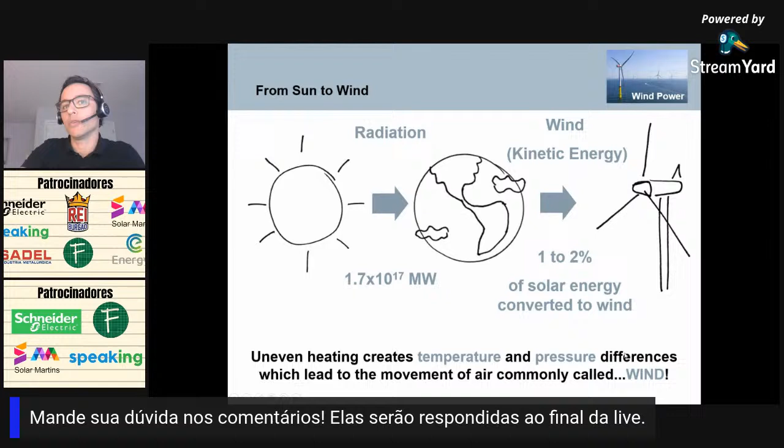So how does that work? From sun to wind. The radiation, I don't think it's new for you, you may already know this concept, but I'm gonna do this anyway. So like I said, the radiation from the sun hits the earth. It creates uneven heating on the surface of the earth, creates temperature and pressure differences, and leads to movement of the air, which is called wind.

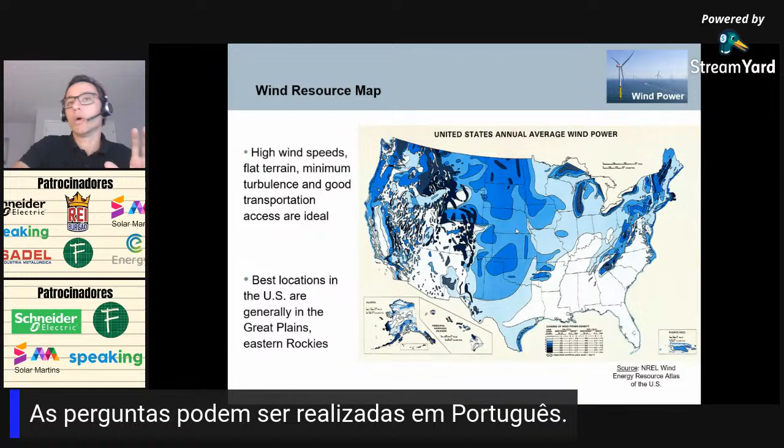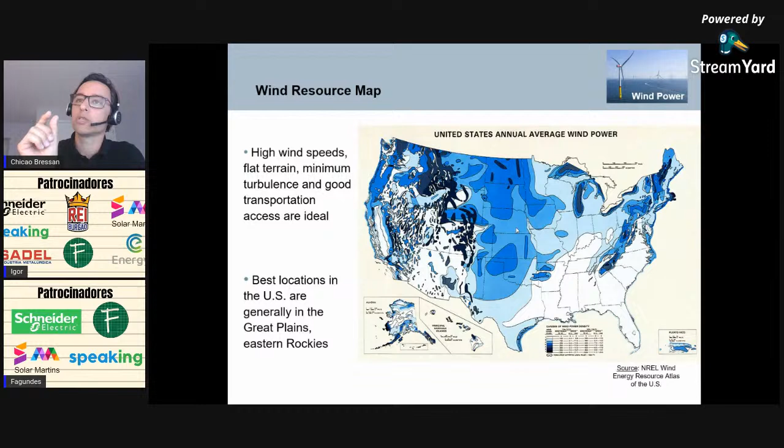So you have this kind of resource map, and this is a macro scale, but we can scale this down to look at a very small area as well, also in Brazil, in any place that you go, okay? Wind also changes over the day. In the morning, it will be maybe high, or in the night will be low. During the night there might be lower winds or might be higher winds, depending on where you are.

It also varies a little bit over the months of the year, right? So if we have wind over here, you see it going up and down over the months. So we have sometimes a better month than the other. It's seasonal, okay? So over one year, we can measure maybe in the summer we have more wind, in the winter we have less wind, and it also varies in years.

So for example, look at this graph right here. In 2007, it was a good year of wind in this place. I don't know where this is, but 2007 was a good year, while 2010 was a bad year. So we have good years, bad years, but overall it averages out at some point. In this case, averaging around 7.6 meters per second.

So wind is not constant, not really reliable in a way to say that you can count on it to produce the exact amount of power. It will go up, it will go down during the day, it will do the same thing over the week, the month, and the year, okay? It will vary. That's the nature of wind.

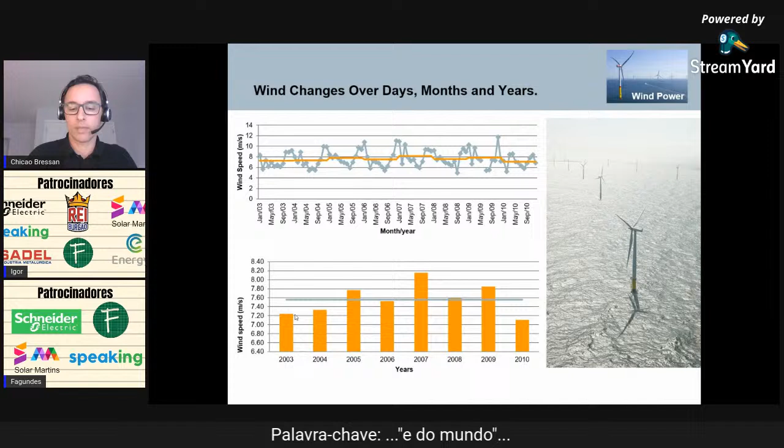Also, another characteristic is called wind shear and turbulence. So there is more turbulence near the ground here, right? Because the air and the wind will have to go through obstacles over here. There are rocks, there are trees, there are houses, there are hills and mountains, and so on.

And as we go higher, the wind will also be higher in speed, in most of the cases, not everywhere. We have more velocity when we go up, and also more steady wind, not too much turbulence, right? Okay, this depends on the place.

For example, in Itajubá, on top of the mountain, it might be different. It might not look nicely like this. It might have even lower wind up there than on the ground. Okay, but this is a normal characteristic, a normal profile for wind shear.

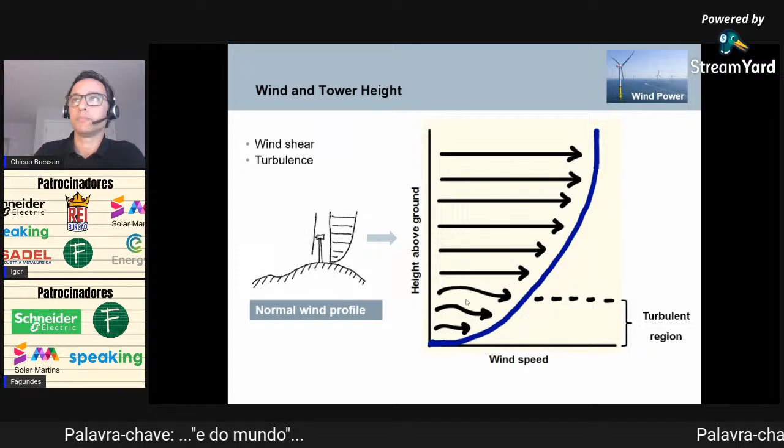All right. Then there was this man here called Bernoulli. You probably heard of him already in Itajubá, right? He says, as the speed of a moving fluid increases, the pressure within the fluid decreases. So thank you, Mr. Bernoulli. With that, we could design the profiles here.

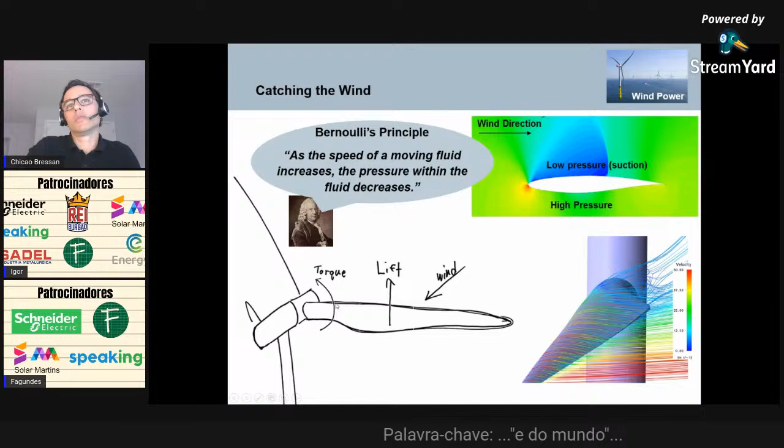For example, the wing of an airplane is pretty much the same thing. So wind turbines like this over here are nothing more than 3 wings of an airplane, let's say, attached together to make a rotor there. So what we want to have here with the flow that goes around it is to increase the pressure under the blade, lower the pressure on top of the blade due to the profile over here, right? So we create a force called lift, okay? And with the lift that we have on each of the blades, we can then turn that into torque here on the rotor, okay?

All right, thank you, Mr. Bernoulli. Next one, energy production. I like to look at this as this is how we calculate the availability of power. And it's a very simple equation here. It's not really complicated too much. If you look at this equation over here, this is the power that we can extract from wind, not the power that is produced in the turbines. This is how much power, in theory, we would be able to extract from the wind.

Actually, there's something that's called the Betz limit, because the maximum possible output that we can get from a wind turbine, and a 3-bladed wind turbine like this one, the very common one that you find, is about 59%. So 59% of all the wind that comes in can be made available to be then captured by our turbine.

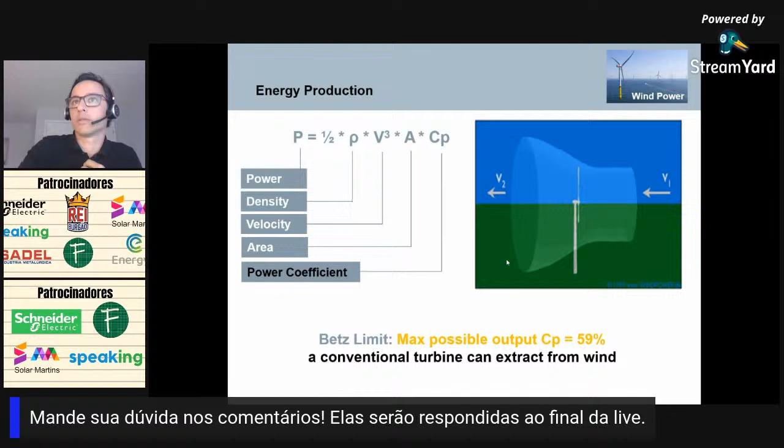Okay, so this is a limit here, because when the air flows through the blade, through the rotor right here, it does not stop right after the rotor. There is no zero velocity right over here. There is still wind over here. There will always be some wind after the turbine. So we can't get all of that power in the turbine, because we're not able to capture all of the wind. So there's a coefficient that we have to add here in the end.

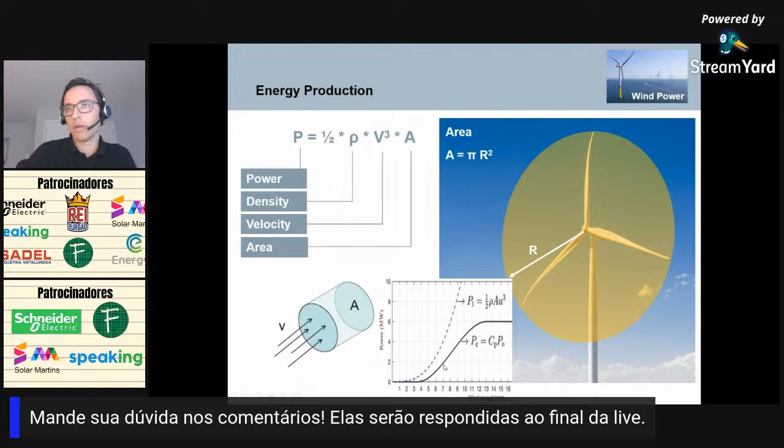Okay, then we can draw what's called a power curve. I'm going to go back 2 slides here and tell you. See, this shape looks like the letter S, right? This shape right here is the same shape right around here. And it's important that we look at the wind power curve, or the turbine power curve, because of different things and different aspects.

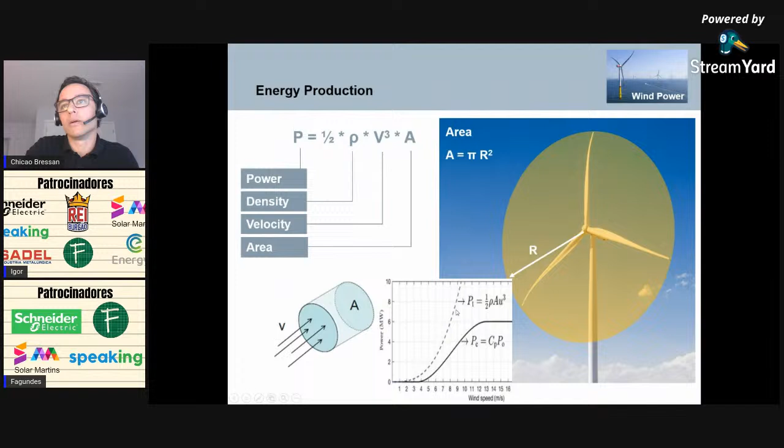Now, if we look at just this part of the curve right here, it looks a lot like this curve right here. So at this point, this is the maximum power that I can extract from the wind, right? Now, after this point right here, the curve starts to tip to the other side. So this side here on the left is facing up, the other side on the right is facing down right here. So why does it start to face down?

So I start to pitch the blade out and let wind go through the rotor and not capture all of that wind. I just let it go by, because if I capture all that wind, the machine is going to break, right? So I have to stop my design at some point. Then I stopped at a certain point right here, which is my design rated power, right? So rated wind speed. So this is the maximum power that I can achieve in my turbine right here.

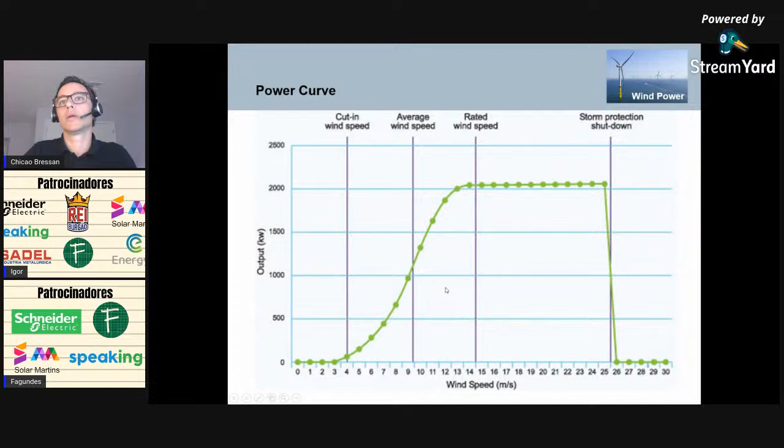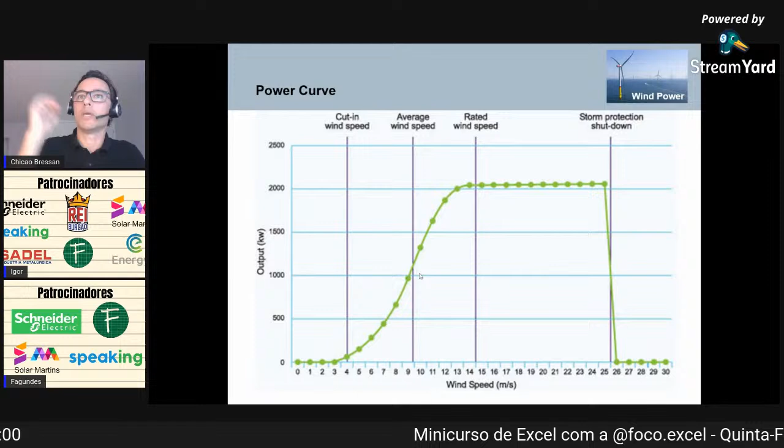When do we start? When do we stop? As far as power goes, when do we stop at the maximum speed here? And important, what is our average? Because this point right here would have to be our best design point. We have to make the turbine to meet that, because that's our best efficiency point, right?

Okay, so talking about how the power, how the energy flows through the turbine. This is a diagram only, okay? Diagrama, only a diagram, right? To make things easier. So we have a rotor and a gearbox.

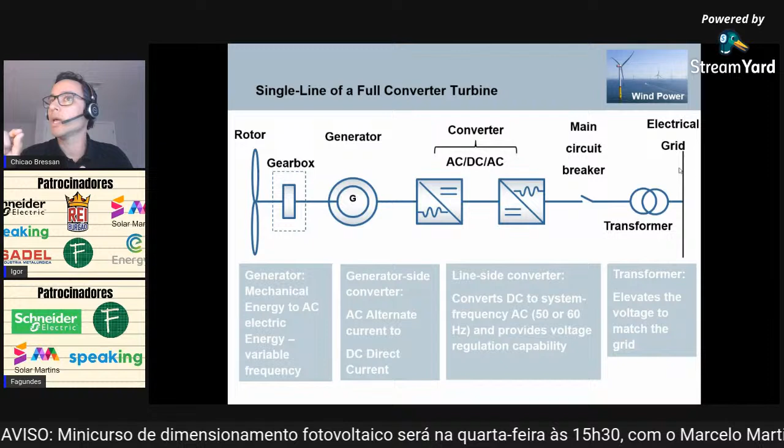But it has a very small deviation. I think it can get up to 60.9 or 60.5 or 59.2. But if it goes above or below that, it will shut down the machine, right? So the rotor here is spinning as much as we have wind. More wind, it might spin faster, less wind, it might spin slower. I cannot control that frequency and also the voltage. So the voltage and the frequency on my generator are all related to how much wind I have.

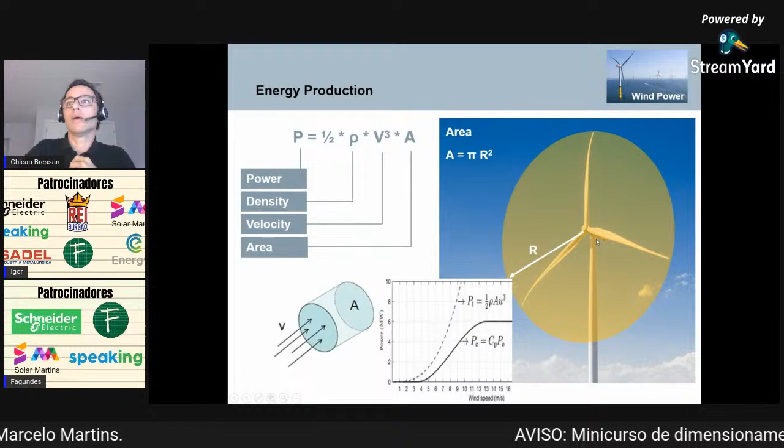So if I have a lot of wind blowing here, my RPM is high, my output is high, but also my frequency can be high and the voltage can be high. And my grid over here does not accept that. My grid has only a limited window that I have to follow. That's why I have to rectify it to DC, or convert it to direct current, and then convert it back

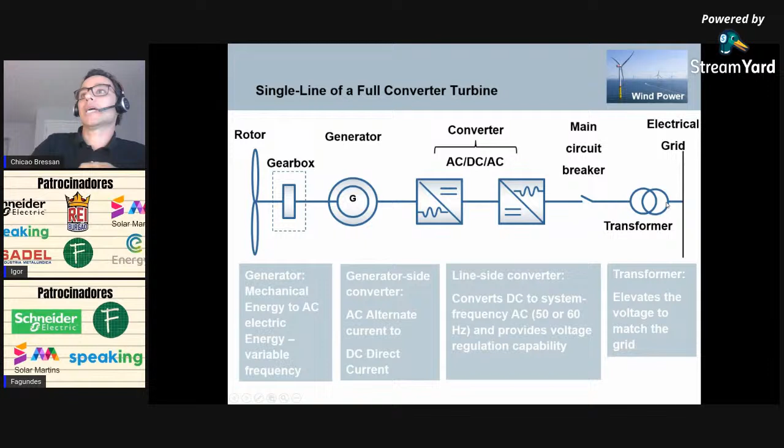to AC. I have to rebuild that sinus, reconstruir a senoide, né, da corrente alternada. Okay? Then we have the breaker here, como se fosse disjuntor, uma chave seccionadora, and the transformer over here to step up the voltage, right? So this is in a full converter machine.

So, all right, let's talk about specific components of the wind turbine now. I think everybody has seen the three-bladed wind turbine, right? And a lot of the questions that come are, why do we have 3 blades? Can't we have 2 blades? It would be cheaper, less money, with 2 blades. 4 blades would be better. I would have more efficiency with 4 blades, with 5 blades, with 6 blades, right?

The thing is, 3 blades is an optimal balance between efficiency on one side and cost, money on the other side, right? So the 3-bladed horizontal axis wind turbine is proven to be very good for this type of application. Can we add another blade? Yes, we can add another blade, but blades are expensive.

So if you put another blade in, it's going to cost a lot of money, and you're not going to get a whole lot of energy out of it anyways. Okay. All right. So let's go to components here.

Starting with foundation, right underneath the turbine over here. Everything is connected, people. Everything is connected. The blade that I choose, the design of the blade impacts my foundation, impacts the design of the foundation. Okay, so the foundation, we don't see it because it's hidden underneath the earth. We have the tower right here with a door that we can get in.

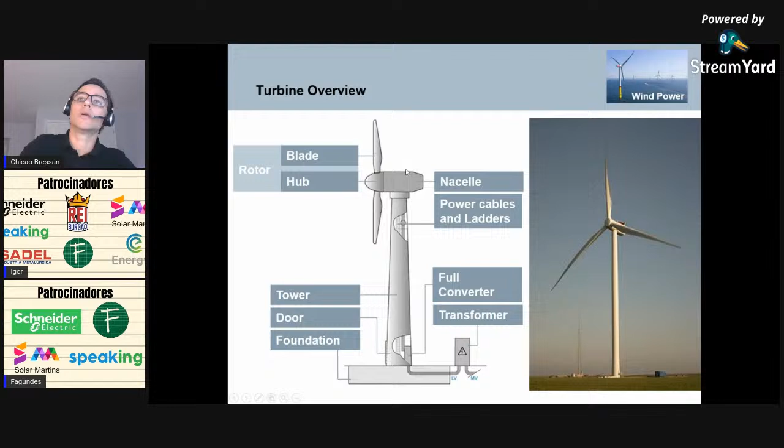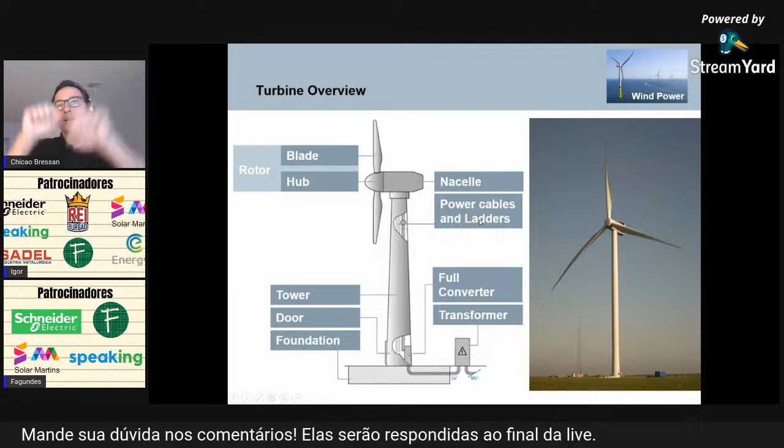In the full converter machine, normally you have the full converter down on the tower here, right? But there are other types of machines where the converter is also up over here. And the same thing with the transformer. Sometimes the transformer is down on the ground, or the transformer is up in the nacelle over here. Inside the tower, we have the ladders that you can climb, and you have the power cables, right? That make the transport of that energy out of the tower.

Nacelle, where all the magic happens. There we have the generator, a lot of stuff, we'll talk about it. And the rotor, blade and hub.

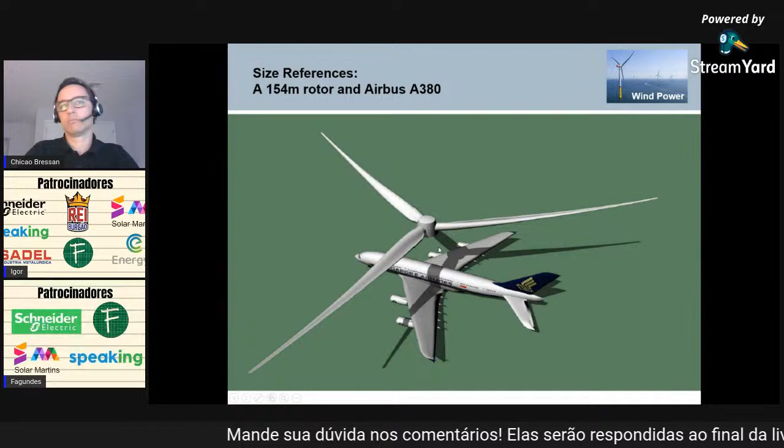All right. Next, just reference. So this is a typical rotor that we are installing in the United States now, 154 meter, and also in Brazil as well. 154 meter rotor, compared to an Airbus A380. So big airplane here and big rotor. So it's much bigger than the airplane. You can see just as a reference so you know how big these things are.

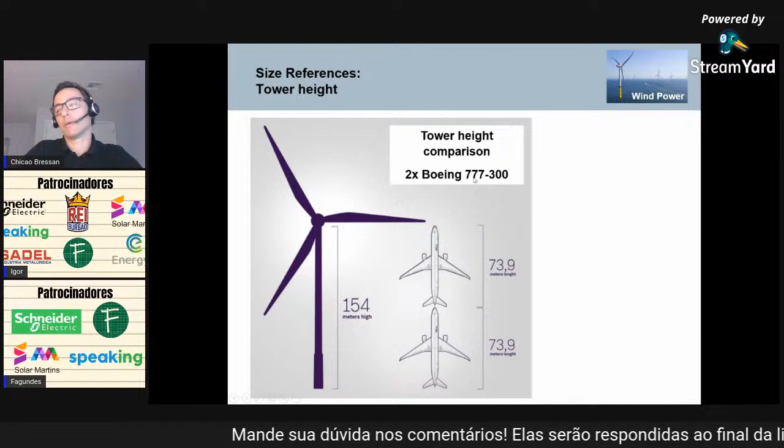Also another reference, since we're talking about airplanes, tower height. So the height of the tower here, coincidentally 154 meters high as well. This is our highest tower in my company, and it's equivalent to about 2 Boeing 777-300. Okay, talk about Airbus, have to talk about Boeing. I don't know.

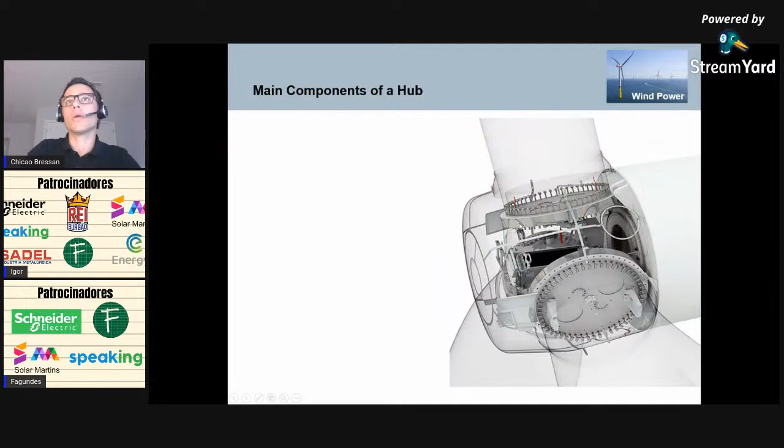Okay, what about the hub now? You can see inside the hub, then we have a hub casting, ok?

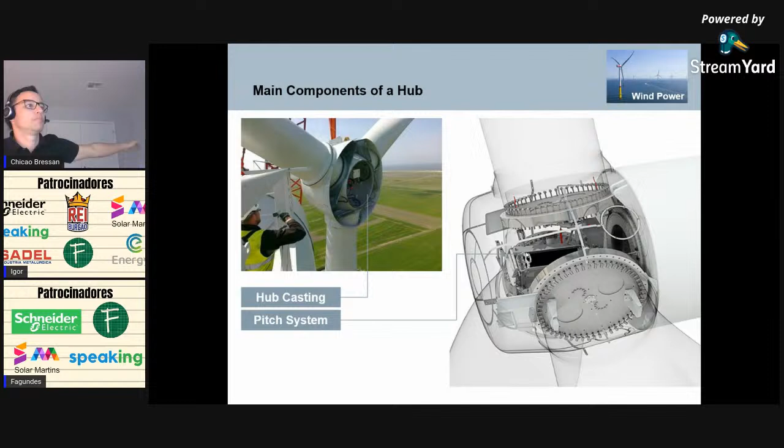This pitch movement here is the same thing as we do with the blades right here. So the blades also have the pitch. They can change the angle of attack to the wind. So there's a pitch system, and we'll talk about it later.

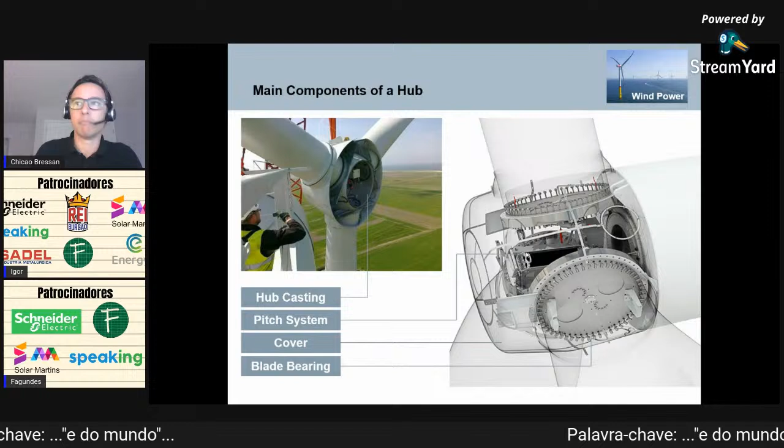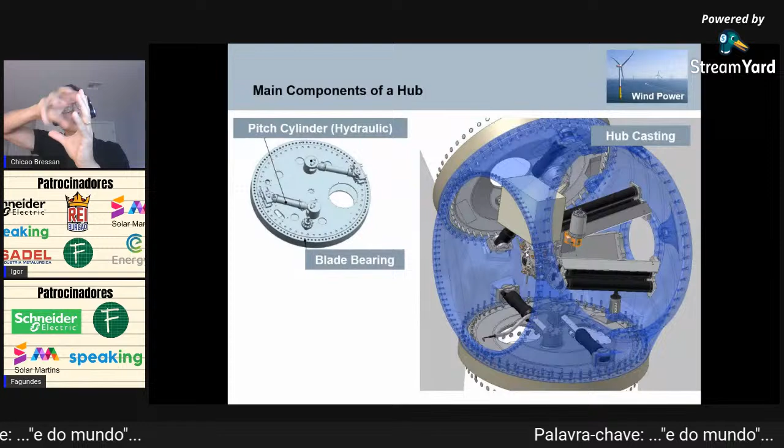The cover here, just a fiberglass cover. The blade bearing, which holds the blade and makes the pitch possible, right? So if you go in detail and do an X-ray of the hub, you see the casting, like I said, in blue here, and you see what's called a pitch cylinder. So there are two pistons, one on each side here, and they work against each other, right? So they can expand and they can retract, and by doing this, they can turn that blade bearing so the blade also turns.

So you do the pitch movement like this by putting hydraulic oil on one side of the pitch cylinder or on the other side of the pitch cylinder. Just like a car, like a motor with a piston that goes up and down, the same thing inside these two guys. There are other ways of doing pitch, like electric pitch, for example. So you can put an electric motor here, and you can turn that motor so it pitches the blade the way that you need them to pitch.

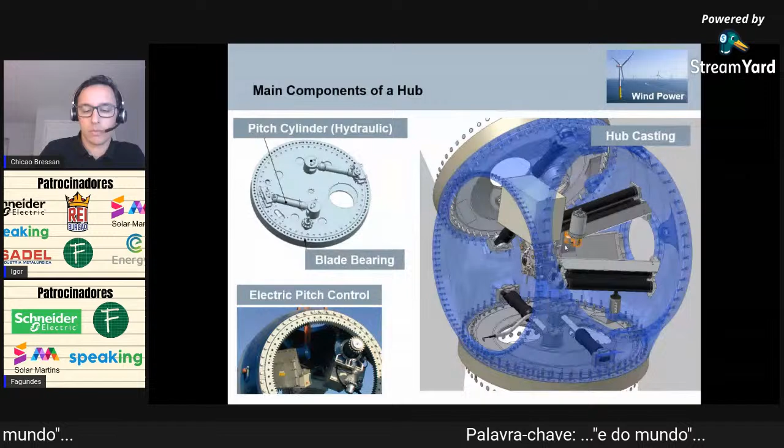So inside here, there's a control cabinet, there's a computer here, everything's spinning, everything is turning. It's very complicated to maintain everything in there. You have to have a lot of attention to the screws and bolts that you use here so that they do not get loose with time and things start moving around and banging everywhere there. So this is hub, okay? Let's see what else.

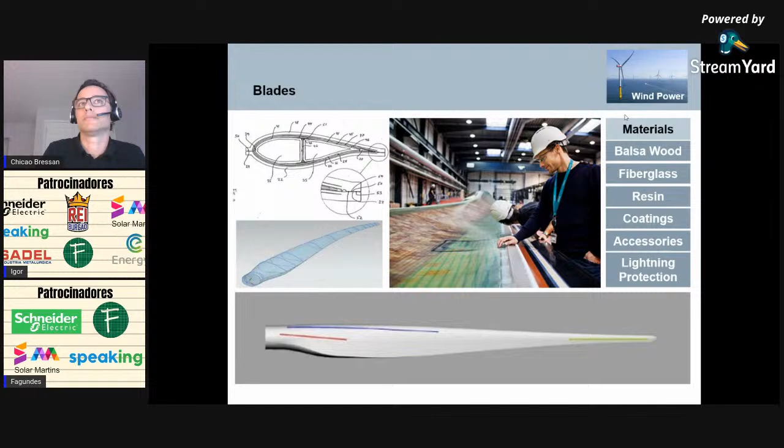Blades. This is not a blade. This is a mold for a blade. This is how blades are made, right? This is a mold for a 75-meter blade, right? You can see they're measuring there. That's where we would lay. This is only the half part. Then we have to put the top part on top. There is one just like this one that goes on top of it, right? So it forms like a shell like this.

We're gonna lay all the fibers. Fiber looks like fabric, like tipo tecido, né? Fiberglass is like fabric that will run the wood, the cable, the structure inside. Then we'll inject liquid resin, right? And then it will cure. And when it cures the resin, then we're going to have the blade, right? So something like this.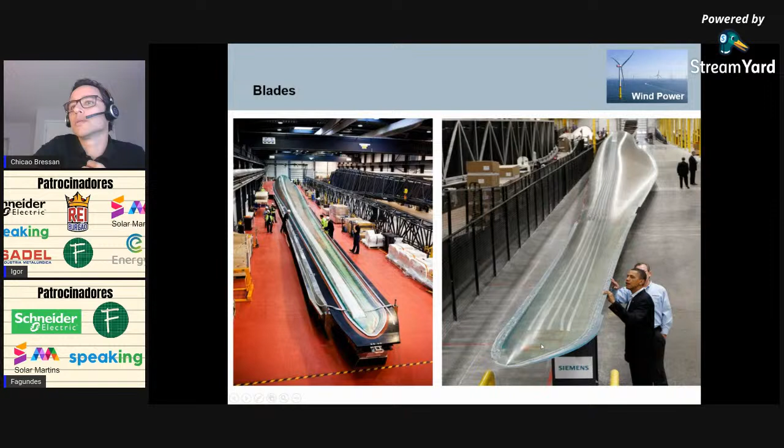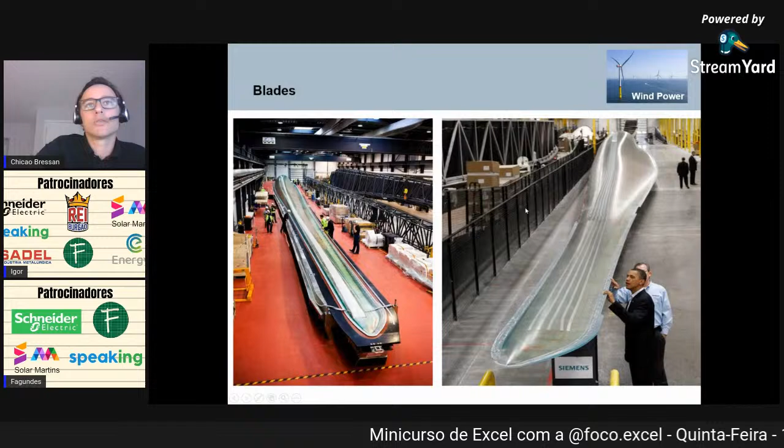Believe me, it's here. And yeah, this is when the president went to our factory there. So this is also kind of the final product there. You can see cables here for lightning protection, they go from one point to the other, right? Okay, right, blades. We're going to talk more about blades later.

Main components in the nacelle. The nacelle then is, like I said, where the magic happens, where we turn wind into electricity. So we have a drive train. The drive train is composed of a few different things.

Gearbox, a gente já falou que é a multiplicadora, gearbox, is responsible for getting the torque coming from the main shaft, o torque que vem do eixo principal, the torque from the main shaft, right? That is supported by the main bearing, certo?

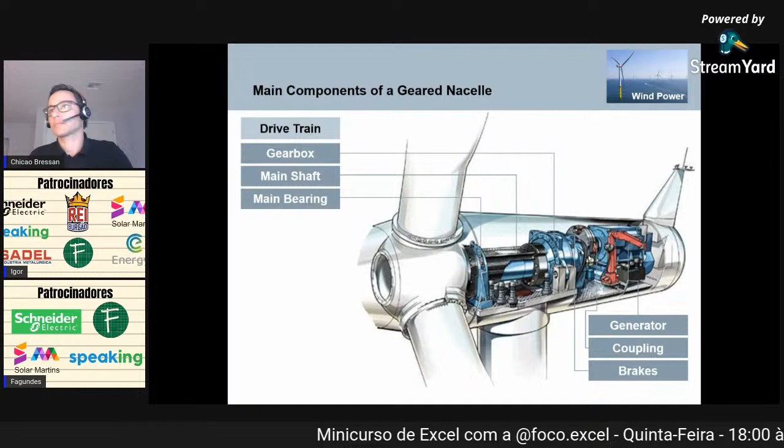Main bearing, main shaft, gearbox. So the gearbox transfers the torque from the main shaft to a high speed shaft that goes into the generator. So there's a coupling right here, this is the generator right here. So the generator coupling, there are brakes, just like the car brakes with calipers, just like in the car, okay? And a few other things like the yaw system that we're going to talk about later. I'll explain what yaw system is later.

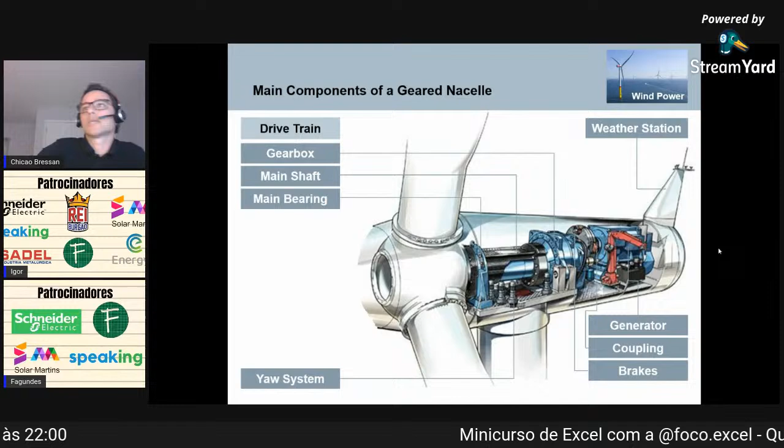On top of the nacelle, there's a weather station for measuring wind and other things. So specifically about the drivetrain, like I said, we have the hub, main shaft, gearbox, then it's coupled with a generator. So this is a picture of a main shaft. This is the brake system, the gearbox right here. You cannot see the shaft, but it's over here, and the main bearing right over here. The bearing is the mancal. Main shaft, main bearing. So this is the main bearing right here.

The typical main bearing is a roller bearing. There are different kinds of bearings. We don't use ball bearings. We use conical or spherical roller bearings in our machines, but it depends on the manufacturer. They can use different technologies. Some machines use more than one bearing. They sometimes have two bearings. We're going to talk about that later. So we have the bearing over here that holds the main shaft, and the main shaft goes inside this piece right here in the gearbox.

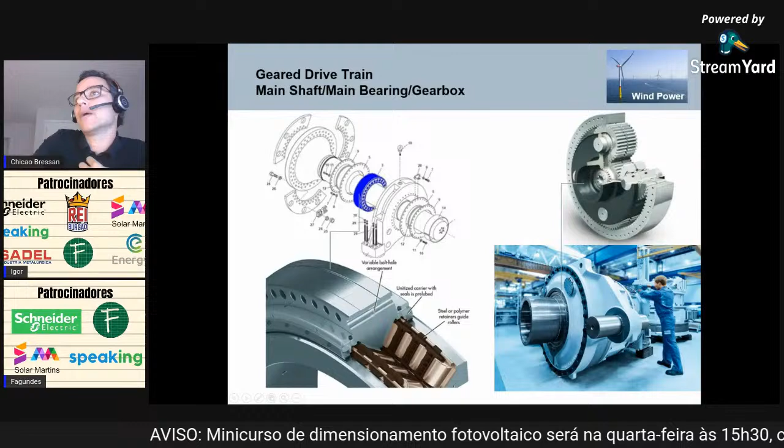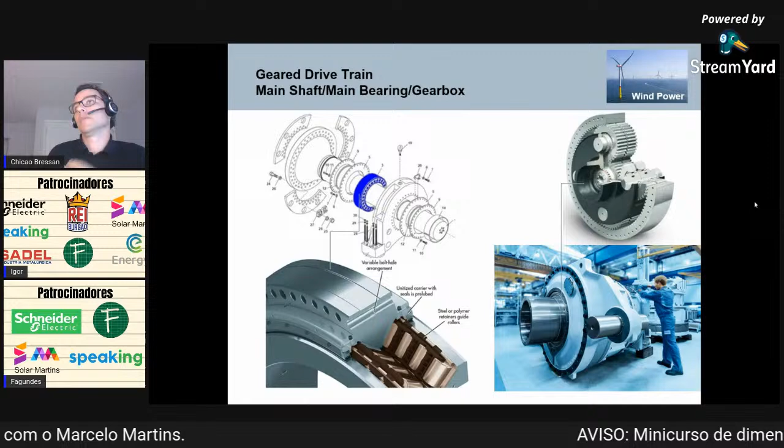Gearboxes for wind power are normally planetary gearboxes, like this. Então, é uma multiplicadora com engrenagens planetárias. So planetary gearboxes right here. You have the main shaft coming in, and you have the planet gears that run around. This type of gear makes the transfer of speed, of RPM, even faster.

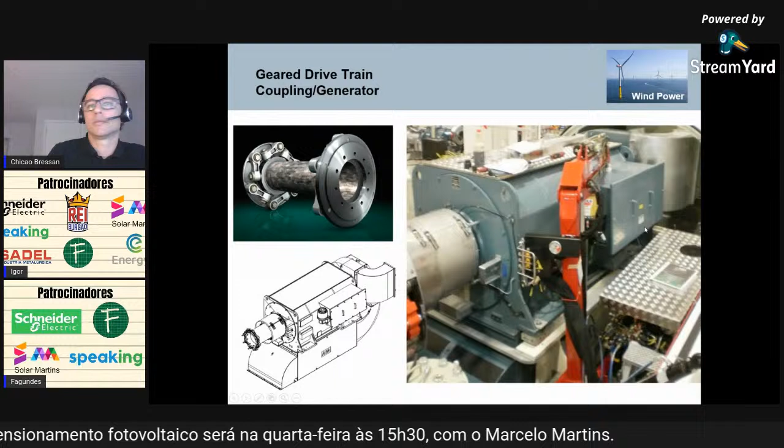Okay. Then we have the coupling, the generator. Generator, I'm not going to go in detail. It's quite known for everybody that does engineering. At some point, you're going to learn about generators. It's a normal generator. It's asynchronous in this kind of machine here, at least.

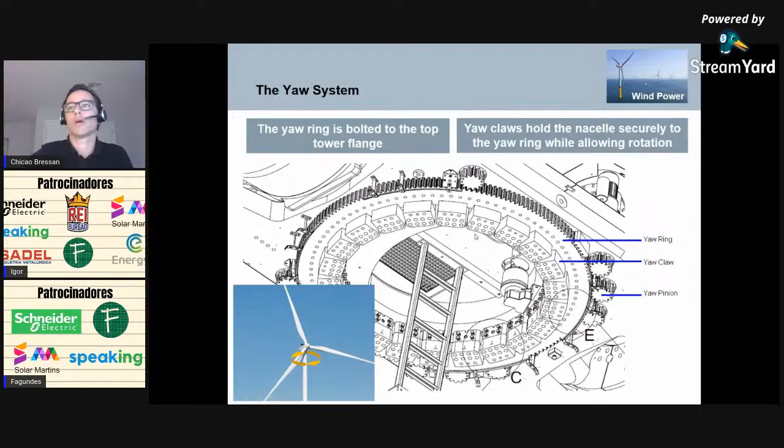Then we have the yaw. I'm going to switch to this presentation a little bit. So the yaw is the movement that the nacelle does trying to find the wind. So if the turbine is facing the wind like it is facing the camera now, and then the wind comes from this side right here, it will turn the rotor and the nacelle to always face the wind. And this is the system that does that. It's kind of a bearing, and then you have electric motors with gears that spin the nacelle like that. It's called yaw.

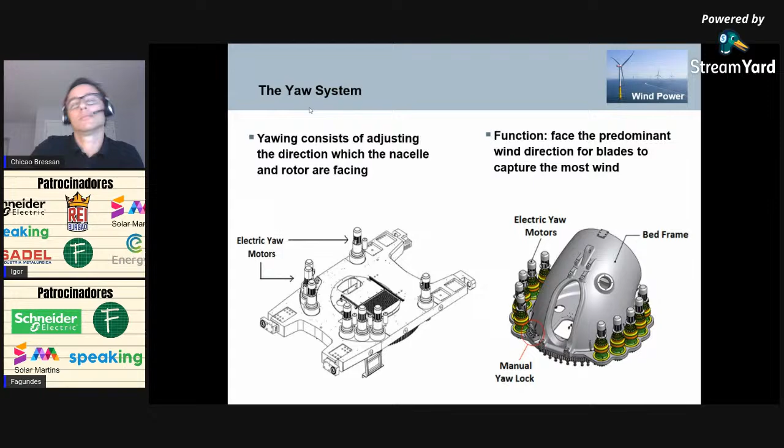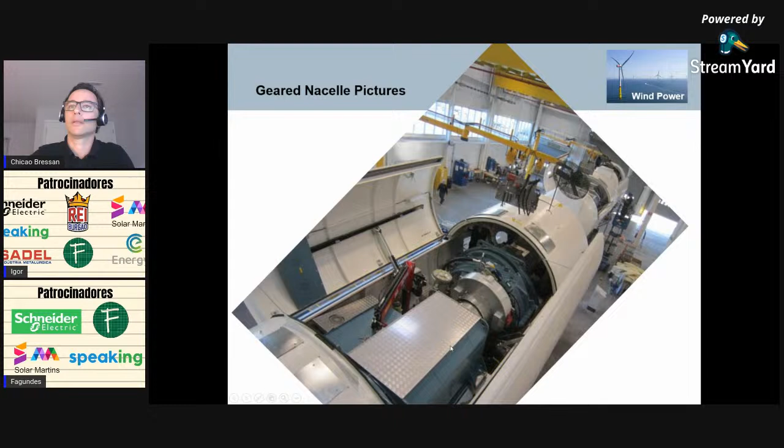So a picture of a geared nacelle, one typical nacelle. It's a small one from Siemens. You can see here the gearbox. Inside here's the main shaft and the generator right on top. There's a crane here for maintenance. I took this picture in Flecheiras, in Ceará. You can see the weather station over here with anemometers, wind vane, generators over here, and you have the big doors on top.

Okay, towers. The most common type of tower that we have is a steel tower, which is steel rolled and welded with the flanges and everything. Inside the tower, you have the ladder, you have the cables. This kind of lattice tower used to be really popular in the past for small applications, small turbines. It is not used today for big turbines.

It's not strong enough. This right here is a type of concrete tower, torre de concreto. A concrete tower can achieve higher heights than normally a steel tower at this point. Okay, so you can have a bigger diameter there.

So towers, not too much of a secret here, but when you talk about a tower that is 100 meters tall, 100 meters of tower like this, the thickness of the steel, a espessura do metal, the thickness of the steel is like an eggshell.

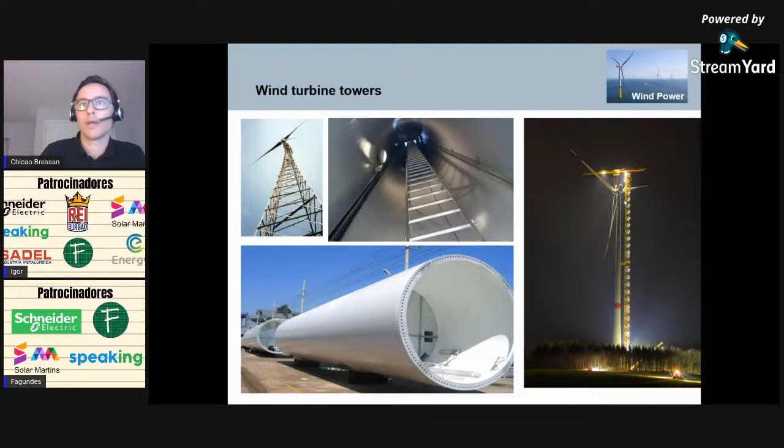So we have to be really careful when doing the calculations, so we don't use a lot of material, a lot of steel that will make this expensive, right? Okay, all right. Foundations now. When we talk about foundations, normally this is the work of the civil engineering guys here, and it's all under the earth, so we don't see anything that these guys do. It's always a bunch of steel here, requires a lot of steel, a lot of calculations.

So it's important because we have different forces. One of the most important ones is this yellow one over here. It's called the overturning moment, which is trying to do something like this. If you watch the video here, trying to do something like this with the tower. This, I think, is the most important one as far as maximum load. There's also all of these fatigue loads.

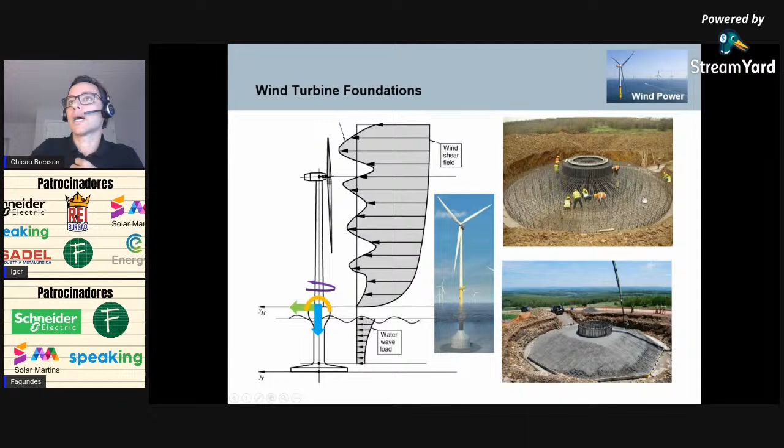So there's also other kinds of moments and forces and everything. Here's a foundation for offshore. We have the water and the wave load also. So we have to care about the wind speed, all of these forces over here to design a foundation over here. Okay, right.

Big thing for wind power, transportation. Transportation is one of the biggest costs. It's where the money goes. It costs a lot of money to transport our big components. You can see it goes on a rail like this. It can go on a truck like this. So we make a mess. We stop roads. It's big equipment. It's heavy equipment. And it costs just a lot of money.

So every time we design our components, one of the biggest limitations that we have is these things right here, transportation. Okay, right. I think I talked enough about components, and I'm going to start to talk about wind turbine design. What do we do if we wanted to design a new turbine? What do we need to be able to start a design from the beginning, right?

The first thing that I, as a designer, would ask is, what kind of wind do we want to design this for? And the good thing is that the IEC standard already has a standard for wind classes. So I can design a turbine for a specific market. In Brazil, let's say I need medium wind, so IEC class 2, for example, has those parameters already defined. So I need a reference wind speed, an annual average wind speed, and the gust.

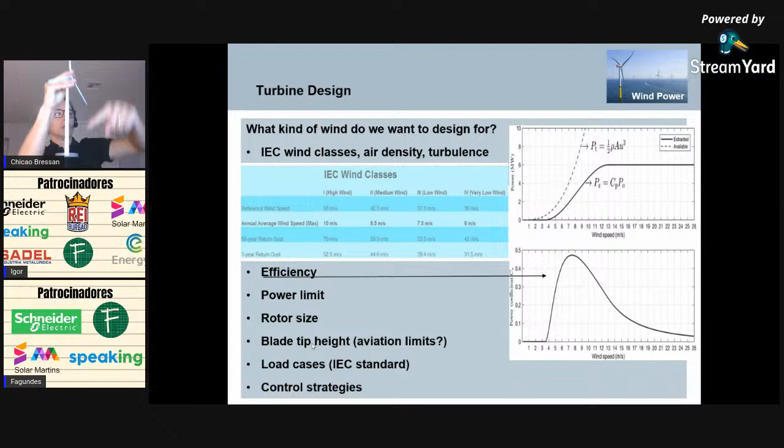So the blade tip height, what is blade tip height? It's the highest point of the blade here. From the highest point to the ground is the blade tip height. Maybe there's an airport nearby; it's an aviation limit. In Brazil, the Ministério da Defesa and Aeronáutica define what the blade tip height is, right? Because of airplanes flying around and stuff.

What are the load cases? Load cases can be: oops, I was pitching and then my pitch system broke. Now I have a full blade here, catching all of the wind, and there is a huge gust here. The machine can't fall. The machine has to keep staying up. So that's a load case. I have to design my machine for the whole load case there. So it's a case that doesn't happen all the time, might happen once in a lifetime, might not even happen, but my design has to account for that, right? I have to account for different load cases.

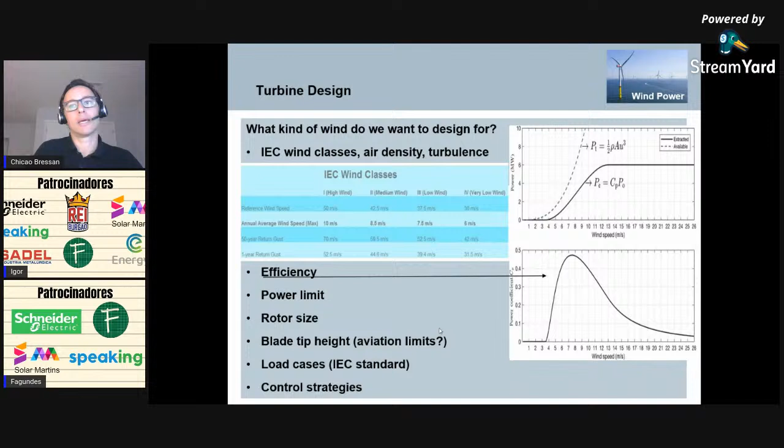And my control strategies, for example, I can have a backup power, por exemplo, eu posso ter no break na minha nacelle, a backup power, so I can keep the systems running. So I always have power to pitch the blade and things like that. And I don't have to account for all the load cases. I can save money there somehow.

Another thing that we have to take into account: what is the voltage level at the terminal? For example, at the generator it's normally like 690 volts, but I can step up to 34.5 kilovolts. Where should my transformer be? Should it be up tower like this in the nacelle, or down tower? If I put it up tower, I can save money on the cables because the cable going down is a very thin cable. But if I put the transformer up, the whole structure of the nacelle is bigger, heavier, because a transformer is a pretty heavy thing. It weighs many tons, so it's heavy.

It also adds heat, it gets hot, so I need to cool the transformer. If I put it down here, I don't need that structure, but at the same time, it's a lot of cables coming down. There's a lot of electric current going down. What is the corrosion protection? If I do a turbine like this that will sit on the ocean, a very high corrosion protection level. If I do one in Itajubá, probably not that much.

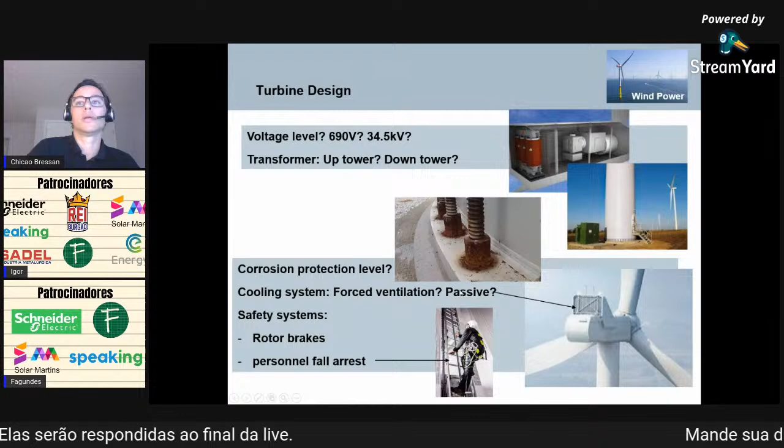Cooling system: do I do forced ventilation or passive cooling like this over here, like a radiator, a big radiator on top of the nacelle? What are the safety systems that I have? What about braking? How much do I have to brake? How fast does the pitch system have to act? How fast do I have to pitch out of the wind so the rotor can stop? Fall arrest for the people that are going to go up so that they don't fall down.

Biggest thing in the wind industry right now: transportation limits. To go on the road, we have to go with smaller diameters for towers. Also, weight limitation. Limite de peso é um dos maiores impactos. So, what to assemble at the factory? If I assemble everything at the factory, the nacelle becomes very heavy. I don't want that. I want it to be light so I can save money on transportation, because transportation is much cheaper if I'm transporting something lighter, right?

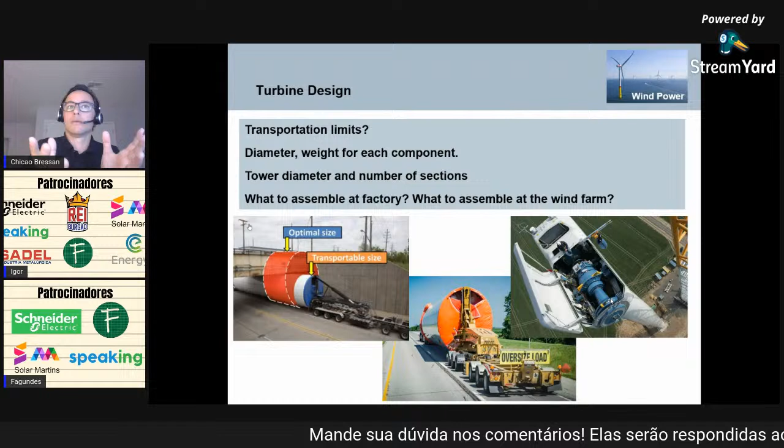So maybe I have to assemble the drivetrain in the field, and I spend money doing this in the field, but I don't spend money on the transportation. It's always a balance. Engineering, guys, is a balance of things. You will spend money or material or steel, but at the same time this will have a different impact.

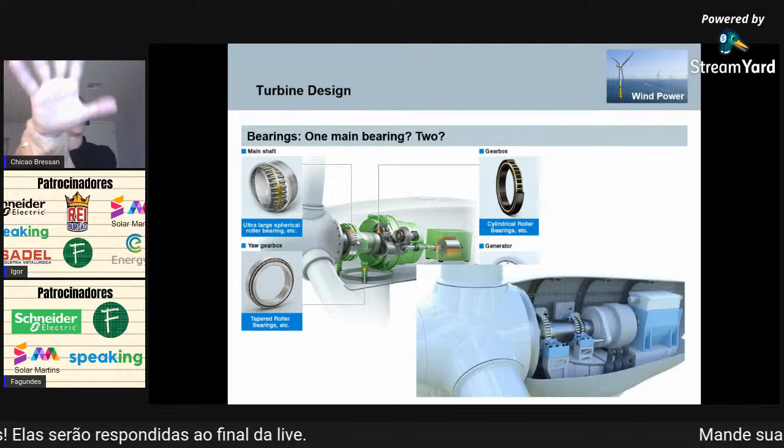For example, here, bearings. Here's a single bearing, right? One main bearing. And the bearing is really important because the bearing is the structure that holds the rotor. So it's a very important piece of this whole wind turbine. But sometimes we have one, sometimes we have two.

So why would I have two? It costs more money to have two, because I can save on the structure. Sometimes I need to have two because the rotor is just too heavy. A rotor can weigh like 80, 85, 90 tons here. So relying on only one bearing would be too much, right?

Decisions, decisions, decisions. That's engineering, guys. We have to make this decision. I can make a really big and fat bearing here, really cool, but I can do two bearings as well. What is better? No right or wrong answer, right? It depends on what you're looking for.

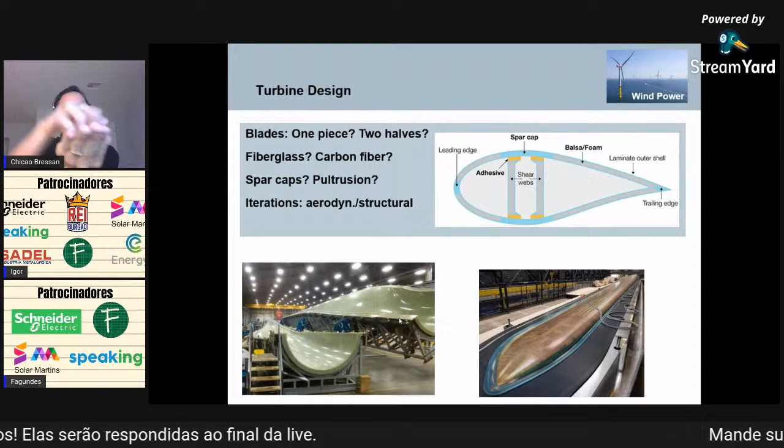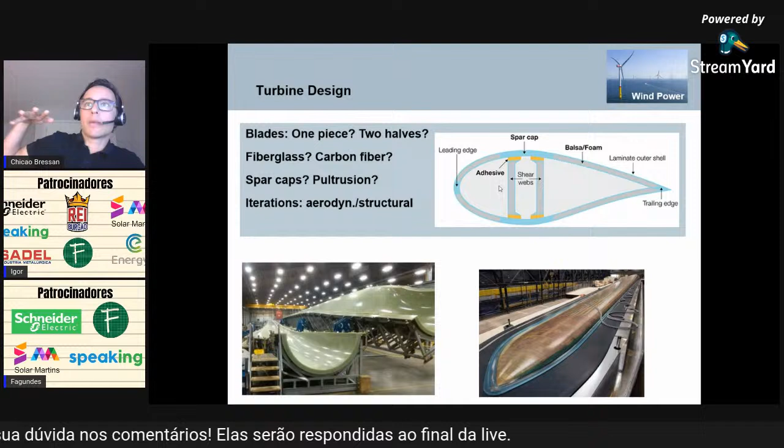Blades, same thing. Can I do a one-piece blade or two halves that I glue together, like these two parts of the blade? I cast them differently, put them like this, and put glue on the side. I can do a spar caps design like this with the webs inside. I can do a pultrusion blade that has more of the same kind of structure throughout the blade.

Decisions, decisions, decisions. The noise level: if I am really close to houses, to residential areas, I need to be aware of the noise. Two examples here that we learn from nature.

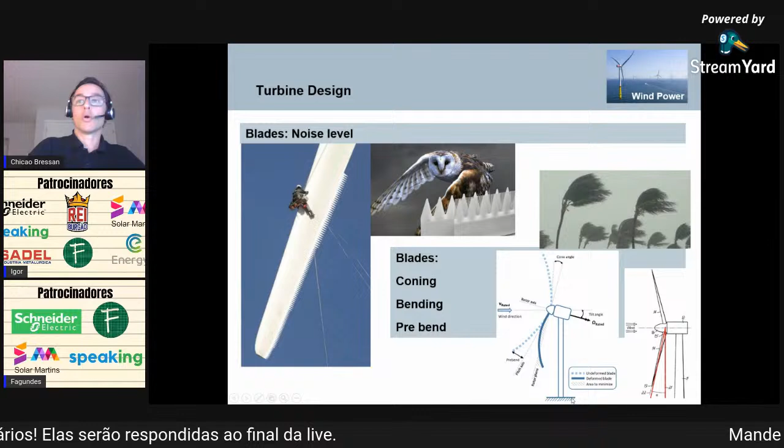Making it flexible will actually make it better, because we don't transfer all of that load to the hub, to the nacelle, to the tower, and to the foundation. So my foundation is smaller because I use a more flexible blade in general terms, okay? The same concept as with the tree and the plants: making it flexible means less loads.

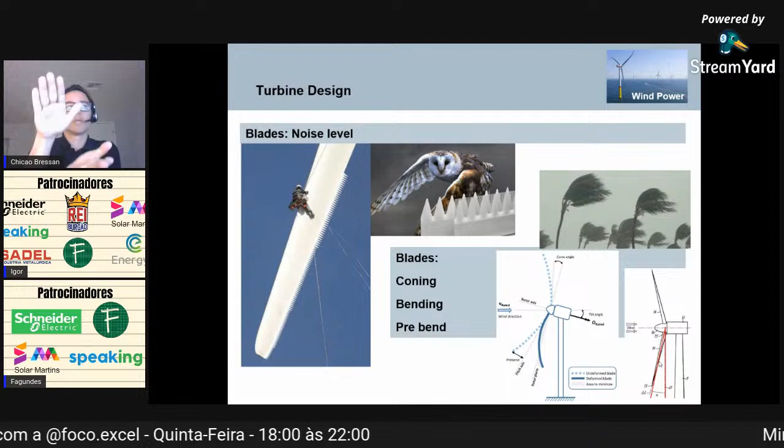We also like stuff like the coning, so I make the rotor a little bit inclined to the front. There's an angle, the red lines here, that tilts the blades towards the front of the turbine, so that when the wind hits, it bends back. So the blades are more like this when they are assembled, and in operation they look more like this. So I have to design the blade to operate like this, but to be transported like this, right?

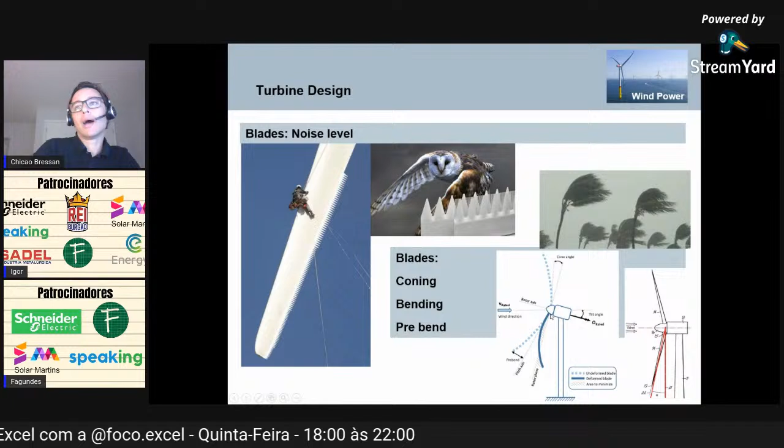If my tower is really stiff, it will conduct a lot of loads. So I want my tower to look like this right here, because it can be a little bit flexible. If it's a little flexible here, my foundation is also smaller. Everything is connected in machine design.

Everything is connected: blade, bearing, control system, software, foundation, generator, converter. The design is always connected, right? There's no system that does not depend on another system. So everything is connected in a design.

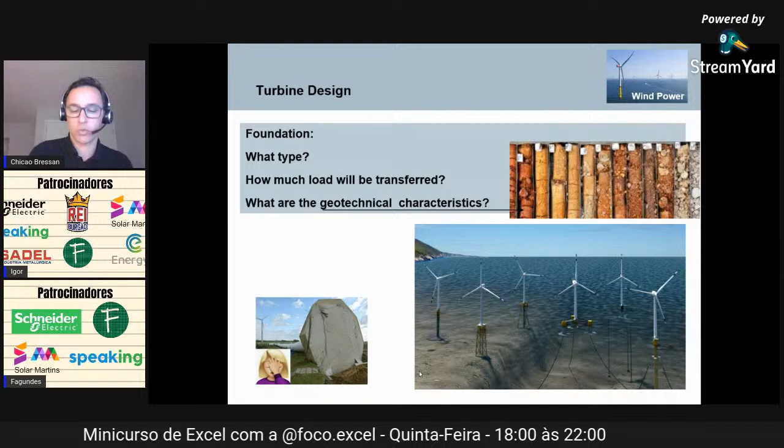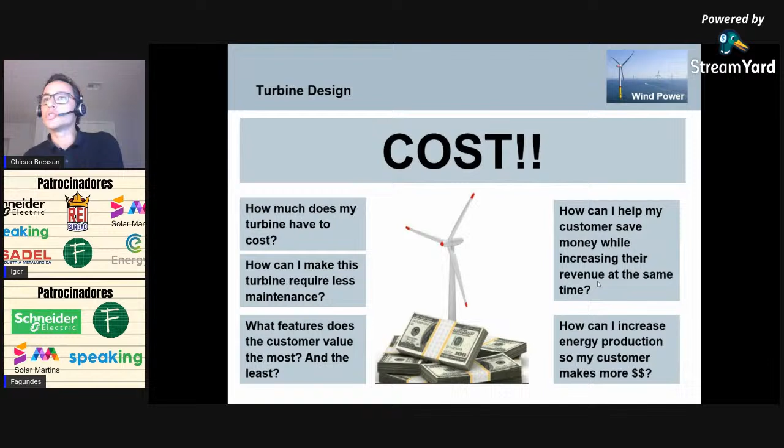Always a question every day like that. How can I increase the energy production so my customers make more money? Everything that we're going to design, if you are in sales, if you are in design, in engineering, if you are in manufacturing, if you are in any field for machines like this, and for any machine in general, I have to say, this word right here will be constant in your day. Just get used to it.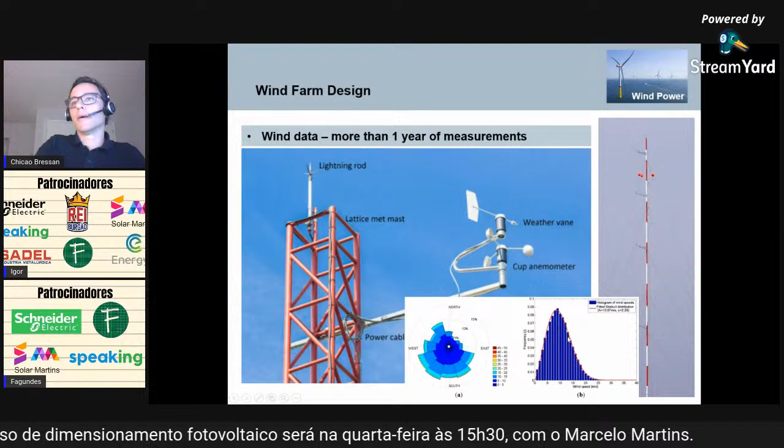Wind rose, a wind rose, and a Weibull distribution here for the wind. You can see here wind speeds, what's the average wind speed, and how much each bin of wind speed is part of that.

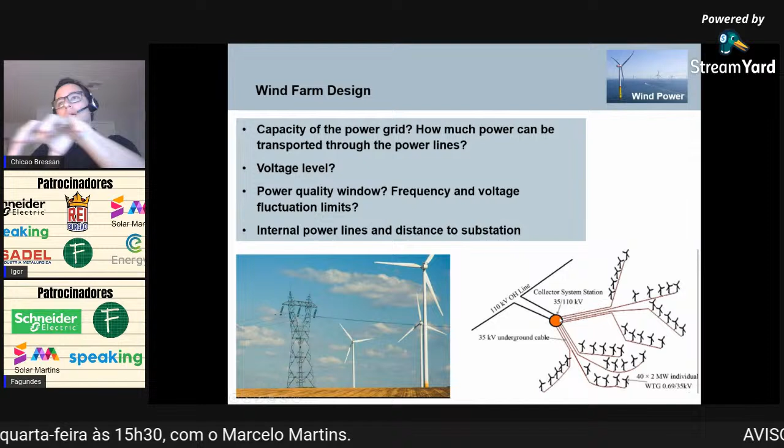So another thing to take into consideration when we are designing our wind farm is the collector system, or the grid, the power grid. So we can place our substation near the power lines like this. Maybe it's 1 kilometer, maybe it's 50 kilometers, maybe it's 200 kilometers from a line. So what is the voltage level at the line? So a 110 kilovolt overhead line like this one, for example, right? How are we going to connect that?

How am I going to place the turbines? What positions I'm going to position these turbines so that the substation is in the middle of it, so that I spend less money on cables and also losses through the cables. How can I lose less energy through the plant's system? So take that into consideration as well.

Other things, for example, this is in Ceará, Brazil. We have the sand dunes here. It's an obstacle, right? So we have to take into consideration when we are placing the wind turbines if it's near obstacles. In this case, the dunes move. One part of the year they're here, the other one they're bigger or smaller.

Another thing is wildlife, like birds and bats. Sometimes there is a specific species of bird that has to be protected in that area. So we have to take care of that and establish control. So the animal only comes at night, like a bat, for example. Bat only comes at night. So why don't we shut down turbines 1, 2, and 3 in this wind farm between 6 and 8 p.m.? That's when we have more bats. Things like that we have to take into consideration as well.

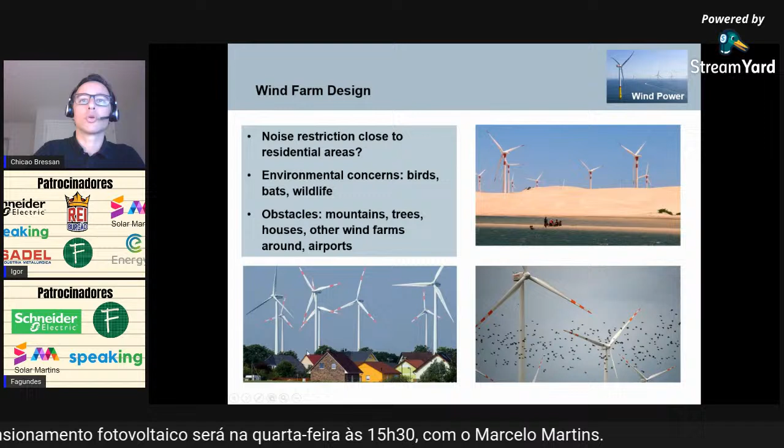Also, if it's close to residential areas like houses, how much noise this is going to generate, and also flicker, right? Shadow on the house, and so on. I have to take that into consideration. Okay.

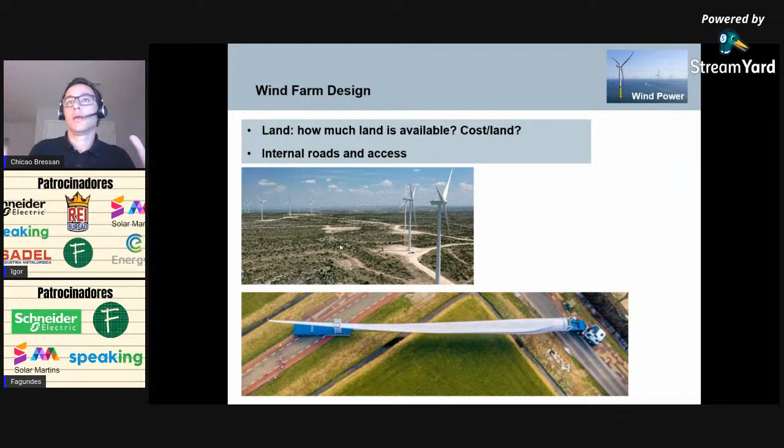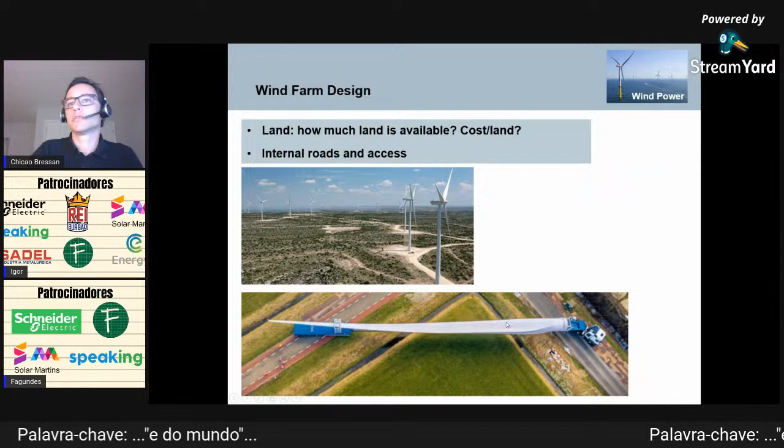Land, right? How much land is available? If you're going to purchase the land, if you're going to rent, or another methodology that is by production, for any production of the machine. If I have a farm and I let people put turbines in my farm, how much money I will make out of it, and it all goes together. So all the roads internally here, access roads to make the curves for the blade transport and for towers and whatever. So we need to take that into consideration as well, right?

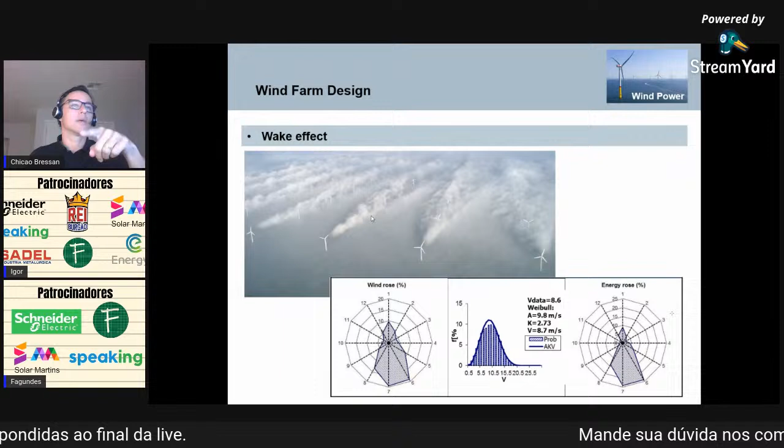So we don't want that. We want the machines to last a long time. So you might put a strategy where the first machine goes really fast and the second machine doesn't spin too fast, so you save the life of the turbine. It's called wake effect, right? Okay, so this is for wind farm design.

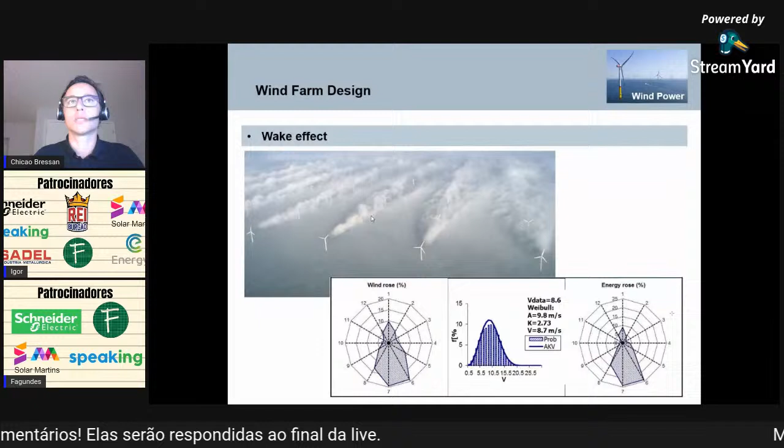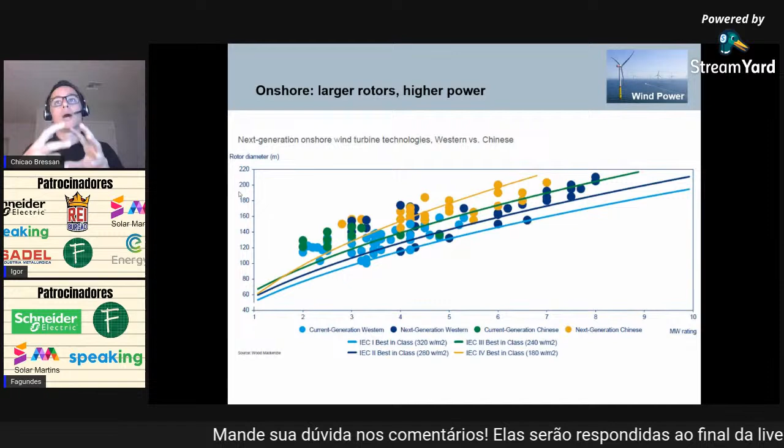But the future, look at the future here. Future is the dark blue and the yellow here. The future goes into higher power machines, so we'll go into the 6 megawatt, 7 megawatt, 8 megawatt range, and also bigger rotors. So the future for wind turbines in the near future is we will become bigger. So the rotors will start to grow more, and the power in the machine will start to grow more. It's just natural, okay? Another thing, comparing onshore

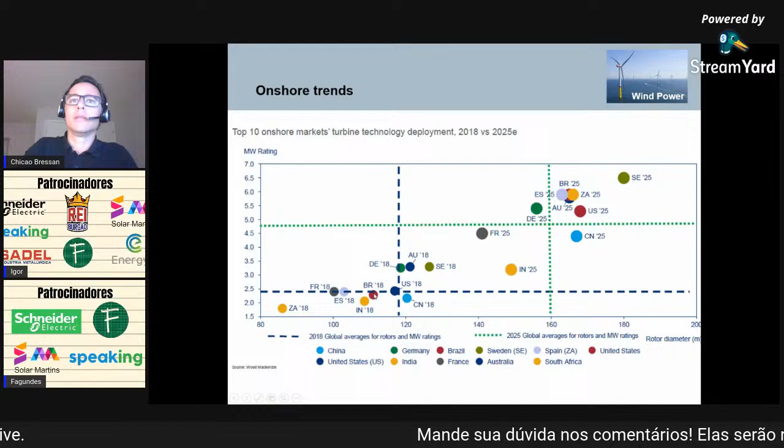This is a little bit hard to read, but I wanted to focus on Brazil here. Here is Brazil 2018, the red dot right here. You see smaller machines, 2.5 megawatts, rotor around 110, 115 meters. So 3 years ago, this was the average in Brazil. Now look at Brazil 4 years from now. Brazil 2025, we have 6 megawatt machines, more than 160 meter rotors.

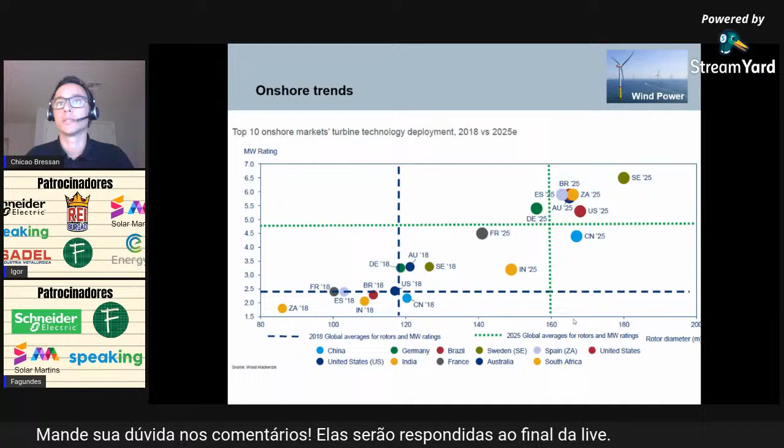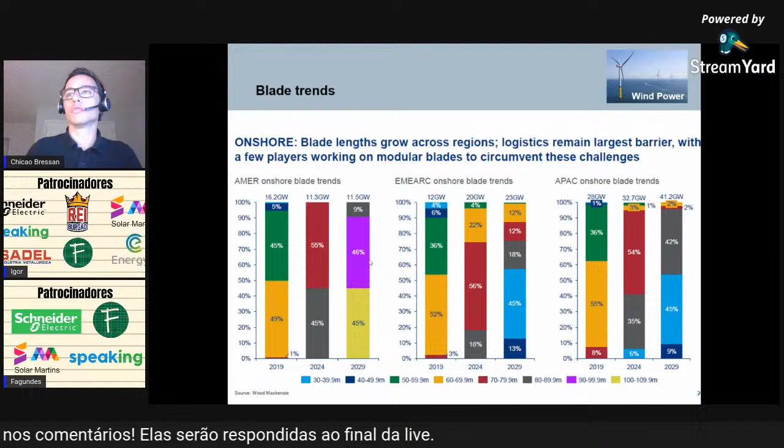So overall, if we can summarize, Brazil and the Americas going for more technological products than the rest of the world, faster, but the message is machines are going to grow. Rotors are going to get bigger, nacelles are going to get bigger too.